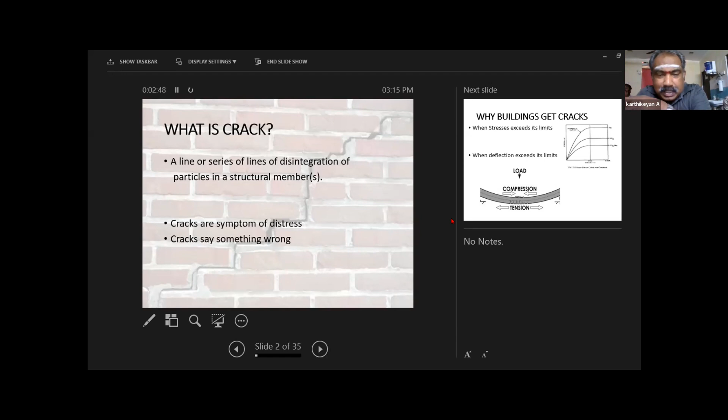Why does a building get cracks? When stress increases beyond its limit, or when deflection increases beyond the limit. There are only two reasons. Majority of the cracks in a building come from two reasons: one, the stress may increase, or the deflection may increase.

Once you load the building, stress develops in it. Every building will withstand stress. In student life, people face exams, so the syllabus is heavy. On normal days, our stresses are less.

In exam days, the stresses are more because the syllabus is more. Within stipulated time, you have to prepare, and within stipulated time, you have to write the exam. So stresses are more. After the examinations are over, your stress is released, you are free, you feel very free. Similarly, in buildings, when people and loads are accumulating on buildings, the stresses develop. When the stresses develop beyond the limit, breakage and failure occurs, which creates cracks.

Similarly with deflection: when you sit in a chair, it slightly deflects. Similarly, if there are a lot of people sitting or standing on a building, the building slab slightly bends, which does not get noticed by anybody - that's okay. But if the deflection is more, then there is a chance of cracks on the slabs.

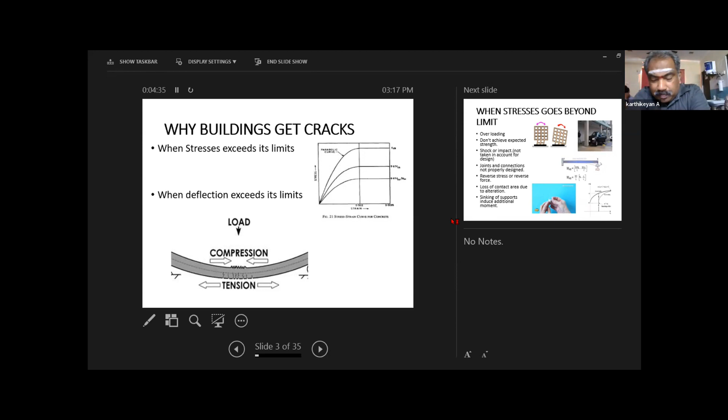When stresses go beyond the limit, mostly due to overloading - say a hall is designed for 200 kg per square meter. Due to some occasions, more people may occupy one floor, one room, or one building. Sometimes it is designed for residential purposes but let out for commercial purposes. The person using it for commercial purposes may store more materials, so the live load increases.

Likewise, overloading happens when a building is designed for ground plus 3 stories or 4 stories only, but people construct 2 more stories over that. So it becomes overloading.

The building does not achieve expected strength. People design for M30, M40, but many don't achieve even M20 grade. Whenever the designer expects something, the contractor or site people might not achieve equal to the expectation of the design requirement. So the expected strength is not achieved.

Shock or impact - there is a corner you can see, a stilt floor column. It's a car parking area where the car may hit the column. It's a shock - during construction, the JCB or lorry may hit the building. So that is a shock or impact, and that also has to be taken into account for design. In industrial sectors this is very common - there are cranes and a lot of moving equipment that may hit the columns.

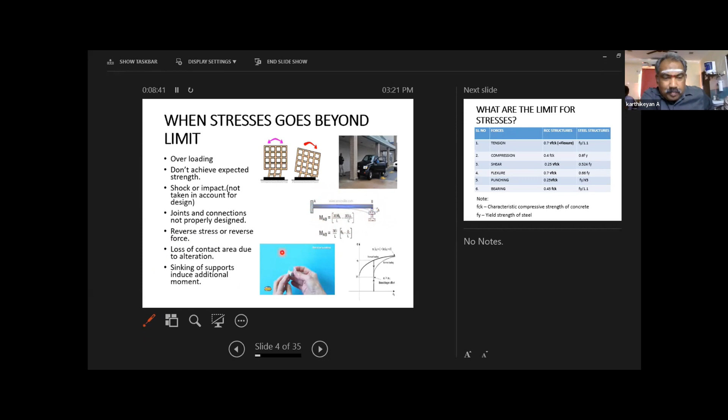What are the limits for stresses? Every material, or every member, has allowable stresses. If it is a tension member or there is a tensile force, in RCC structure, 0.7 root FCK is the allowable flexural stress. For steel structure, it is Fy, the yield strength, divided by 1.1.

I think it's fine, sir. Is it, ma'am? Yes, sir, previously I left it here - where the limit for the stresses is. Yes, sir, yeah, please proceed.

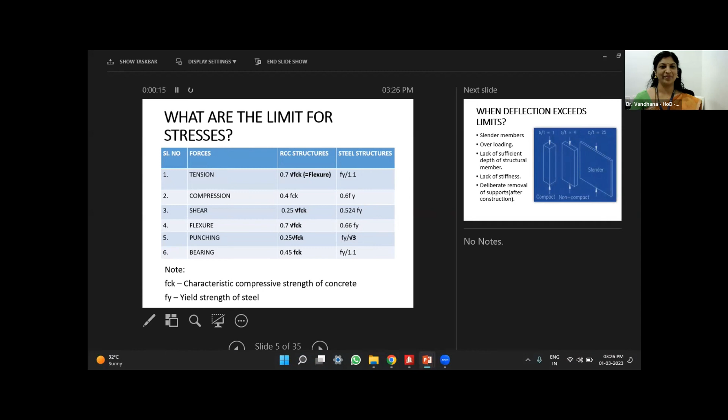So if the tensile forces increase beyond the flexural values, there is a flexural crack or tensile crack. Similarly, if there is a compression crack - if you overload the structure, there is a chance of more compressive stress. If the compressive stress is more than 0.4 FCK, there is a chance of compression cracks.

Shear cracks - that is, the joint is like a scissor. If you take two knives acting parallelly in one direction, the paper or cloth will not cut. But in a scissor, there are two opposite reactions - one is action, another is reaction. If you introduce a paper or cloth, the scissor cuts it. Similarly, when there is a beam column joint or beam column foundation joint, wherever there is a joint, one action and reaction is there. When there is an action and reaction, there is a chance of shear crack.

So the shear stress should not exceed 0.25 root FCK in concrete, or 0.524 Fy in steel. In flexural cracks, as already discussed, it is tension 0.7 root FCK in concrete, or 0.66 Fy in steel.

Punching - when a column meets a foundation, there is a chance of punch. That is, the column's area is very, very less when compared to the foundation area, which is very big. So there is a stress concentration, called punching stress. If the punching stress is more than 0.25 root FCK, then it creates cracks.

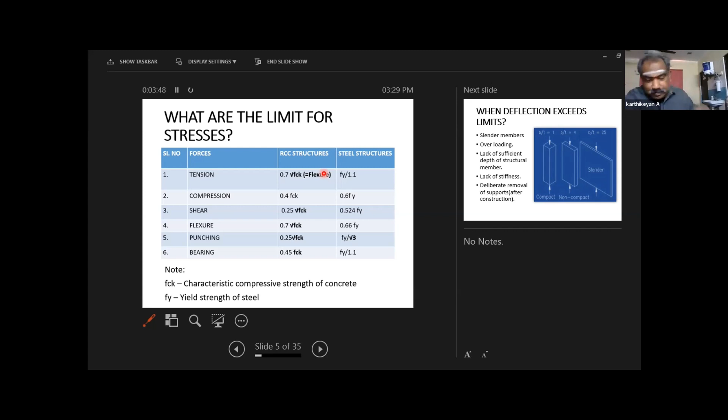If the stresses are beyond the limit, there is a chance of cracks. Deflections - as I said earlier, architectural constraint or contractor constraint or economical constraint make us create slender members. Nothing wrong with that, but this slenderness should not increase the stress and should not make the member more deflectable, more deformable. Due to overloading also, the members get deformed. Lack of sufficient depth in structural members is another cause.

Our very first introduction in strength of materials, engineering mechanics, or applied mechanics is moment of inertia, I equal to BD cube by 12. So in case of IS 456 or IS 800, codes are very much concerned about span by effective depth ratio, but they are very silent about width ratio. They are very strict: if it is a cantilever, 7; if it is simple support, 20; if it is continuous, 26; and if the span is more than 10 meters, different rules apply.

So lack of stiffness is another important reason for more deflection. If there is more deflection, there is a chance of cracking. And deliberate removal of supports after construction - sometimes the architect wants to remove a column. People blindly remove the column, and the beam simply becomes a cantilever beam that will deflect more. Premature removal of formwork without proper stripping time also leads to cracks.

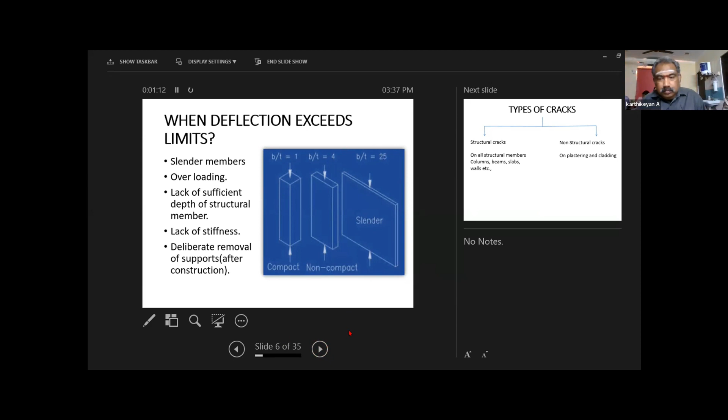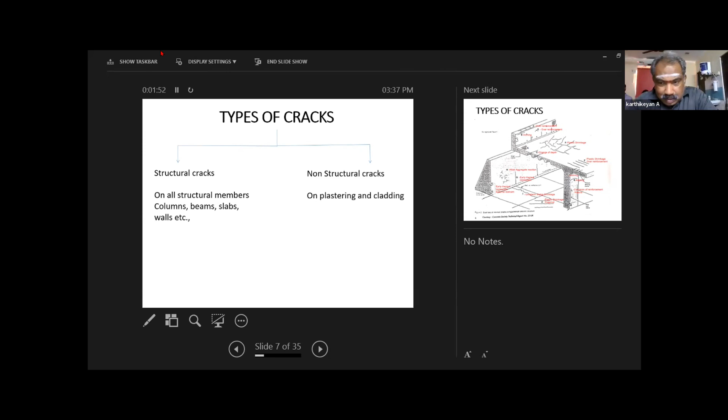Cracks can be classified into two types. One is structural cracks, another is non-structural cracks. Structural cracks are the cracks on structural members like columns, beams, slabs, walls, etc. Non-structural cracks are the cracks on the plastering and cladding elements. Non-structural cracks you need not worry about much, but structural cracks give some warnings that something is wrong. But common people don't know what is a structural crack and what is a non-structural crack, so they fear cracks.

In case of RCC, people think more steel is more safe - that is a bad thinking. If there is more steel with very less spacing, ductility issues again start, and there is no proper bonding between the steel and the concrete, causing cracks due to over-reinforcement. And alkali-aggregate reaction - that is a different topic we have discussed elaborately - is where the coarse aggregate and fine aggregate react with the cement. That reaction may create cracks. If there are overreactions, that also creates cracks.

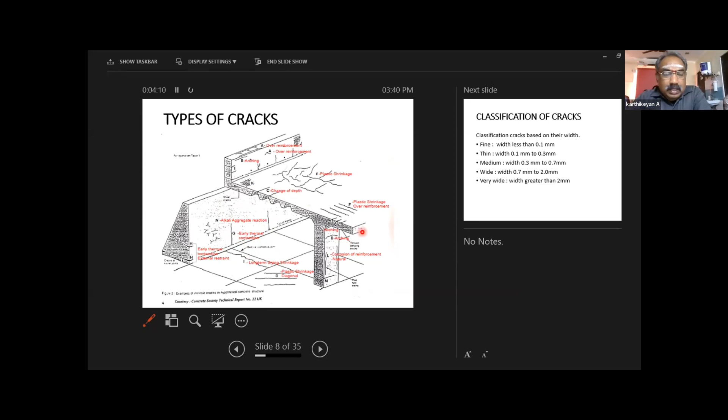There are 17 types of cracks, we will go one by one. Before that, classification depends on width of crack. We can classify fine crack, that is less than 0.1 mm, which is not visible by the human eye.

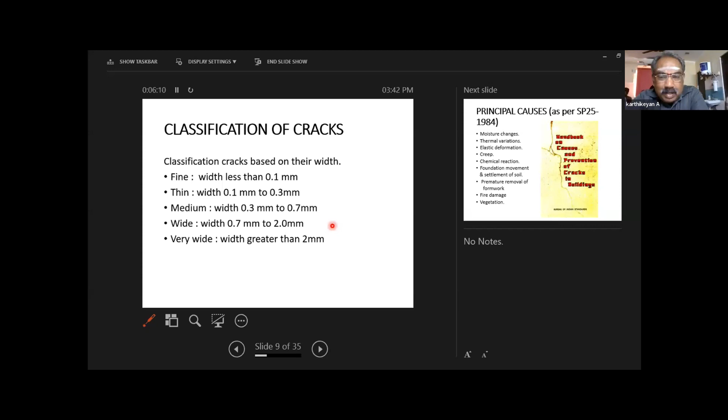There is a book called Special Publication 25, 1984 by the Bureau of Indian Standards. They issued a handbook on causes and prevention of cracks in buildings.

They classify the major principal causes as moisture changes. In the season changes, there is moisture changes and thermal variation, both depending on seasons. Also elastic deformation.

When you are sitting, and then you go out from the room, the deformation rebounds. Fatigue: assume you take a thin plate and apply forward and reverse repeated deformations, that creates fatigue.

Take 1 kg of apple or fruit in a plastic bag, which is proven, should be prevented. You purchase it in a plastic carry bag and hook it on a nail or something. After 1 hour, you need not add even 1 gram of additional weight, but the plastic bag, because of constant stress, the creep creates cracks. That is also created in buildings.

Chemical reactions, as I told earlier, there are alkali aggregate reactions and other chemical reactions in buildings that create cracks.

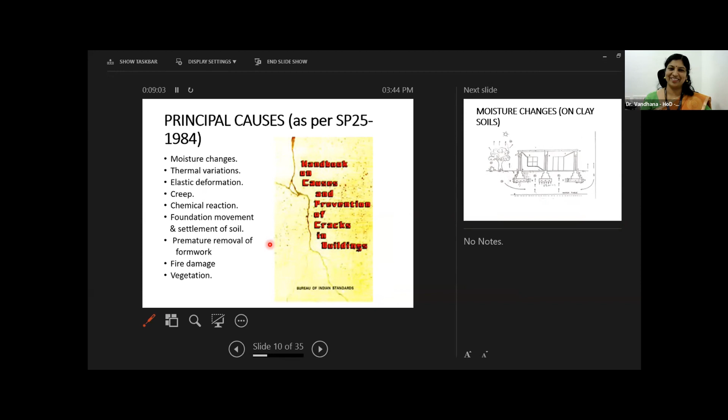Premature removal of formwork. Sir, there is IS 456 which clearly gives up to... there is a slight lag in your audio, sir. It's slightly interrupted, I guess. Maybe keep it a bit away. Please proceed. Is it okay now?

Premature removal of formwork. People put formwork, then they pour concrete. For a given span, there is a required strip time. Before that, you should not remove the formwork. Sometimes due to site conditions, people force the site engineer to remove the formwork to meet the construction schedule, so they remove it prematurely.

Fire damage: in some places a fire may occur accidentally, and it may damage the concrete or masonry, creating cracks in the building. Also vegetation: nearby tree roots may penetrate into the building and create cracks.

So these are all the major causes of cracks in buildings. This is very clearly given in the handbook on causes and prevention of cracks in buildings. You can easily download it online: SP 25, 1984.

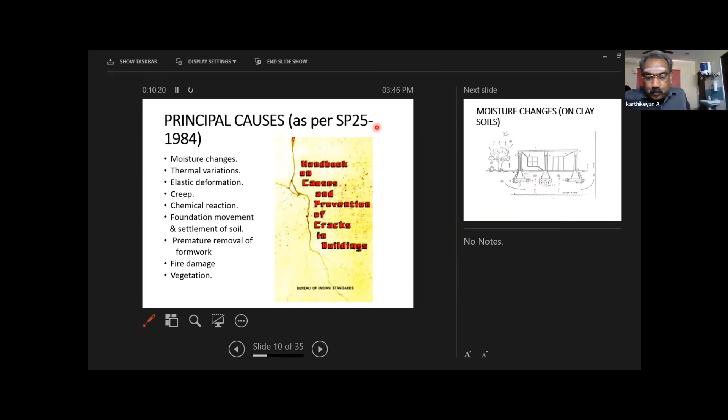Moisture change is the most important factor, particularly in clay soil. If it's an expansive soil, the bearing capacity is already poor, but the moisture creates a very vulnerable chance of cracks.

Assume you are not constructing any building on a land; it is a fertile, virgin land with nothing on it. At that time there is some moisture content, say 30% or 40%. Now assume you construct a nice building on it.

What happens? You are preventing the moisture from evaporating from the soil. The building blocks sunlight, so it protects the soil moisture underneath. But outside the building, trees suck the moisture and there is evaporation of surface water.

So there is a moisture imbalance: outside the building it is dry, inside it is moist. If it is clay soil, there is shrinkage. You may see this in paddy fields, with a lot of shrinkage. So shrinkage is dominant around the contact area, and the foundation is the contact area — the soil and structural contact area creates a lot of shrinkage.

Here the density is more because of more moisture; there the density is less. If the foundation is not enough to withstand the lateral pressure, there is a slight movement, and that movement creates cracks like this.

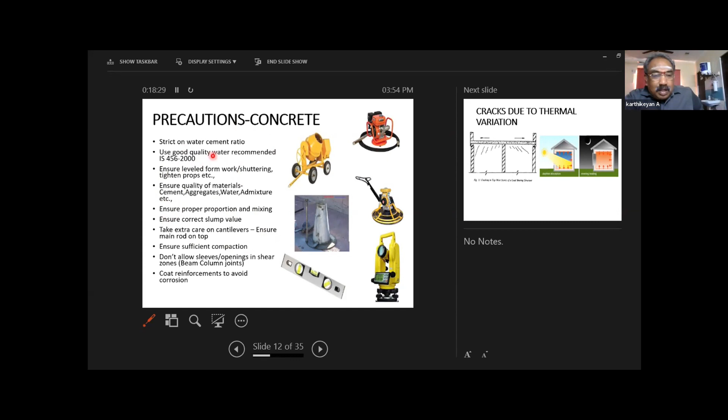Due to thermal variations, in our country, in Tamil Nadu, South India, our temperature in summer is 45 degrees Celsius, and in winter it's 20 or 25 degrees Celsius. So there's a 20-25 degree Celsius variation. The top surface expands, and when it expands, there are cracks at the slab and wall junction.

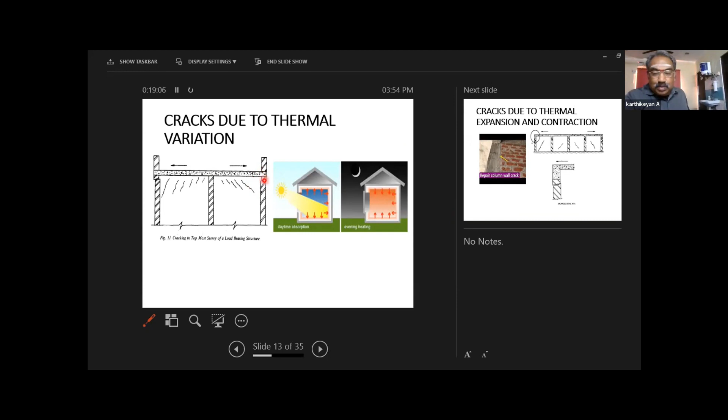So people may think that if you provide a beam, there will be less chance of cracks. Yes, if you provide a proper beam, there is less chance of cracks. But my next slide shows that even with a beam, there is a chance of crack below the beam. So how do we avoid it?

Most of the cracks are in masonry, because in RCC, other than corrosion, the cracks will somehow be withstood because steel is there. Steel takes care of tension, concrete takes care of compression, so it will somehow manage. But masonry is a brittle material, so in case of masonry there are more chances of cracks.

For that, choose proper brick units. That is very important. Bricks should be well burnt.

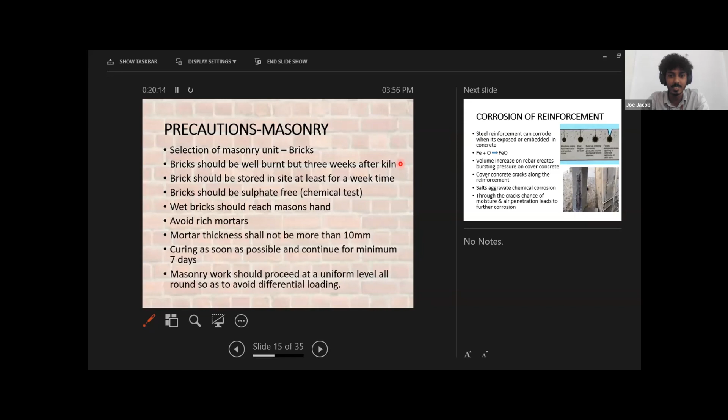Rajesh Datta is asking whether SBC of soil plays a major role with structural design, and whether in clay soil it can avoid cracks. SBC purely depends on the size of the foundation. In my previous slide, this person designed for the size of the foundation based on SBC, and he calculated the load in the vertical direction, Fy. So for load versus bearing capacity, there are no issues.

But because of moisture variation, the inside moisture is more, the outside moisture is less. There is a push. If the substructure is not sufficient to withstand this push or swell, there is a chance of movement, and if there is movement, there is a chance of cracks.

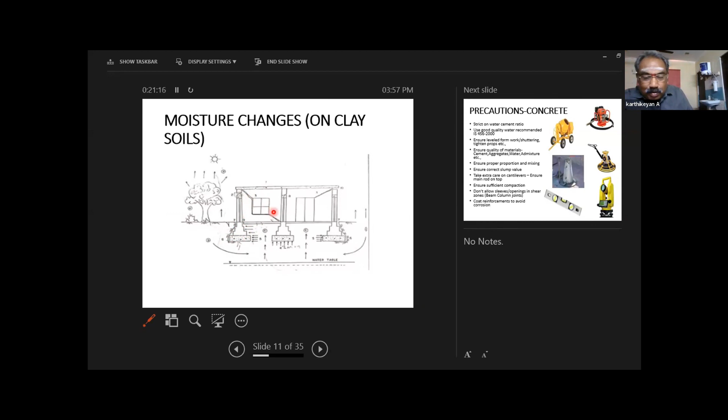Are you comfortable, are you satisfied, Mr. Rakesh or something? Are you comfortable, are you satisfied? Yes, there are a lot of issues regarding soil-structure interaction.

I will explain in further slides. Before that, let us go into brick units. People are in a hurry to purchase the bricks. The bricks should be well burnt, and only after 3 weeks from the kiln or chamber should they be brought to the site. On site, the bricks should be seasoned for 1 week, because the manufacturing temperature is different from the site condition temperature. So you season it for 1 week.

Then the bricks should be sulfate free. If you have any doubt, check it with the chemistry lab. What happens if there is sulfate? You are applying cement mortar with the brick units, and the sulfate reacts with the cement mortar to make calcium sulfate. The calcium sulfate becomes a weaker material, it peels off and becomes powder form, and falls down from your masonry. This makes the masonry weak and causes a lot of cracks, so it should be sulfate free.

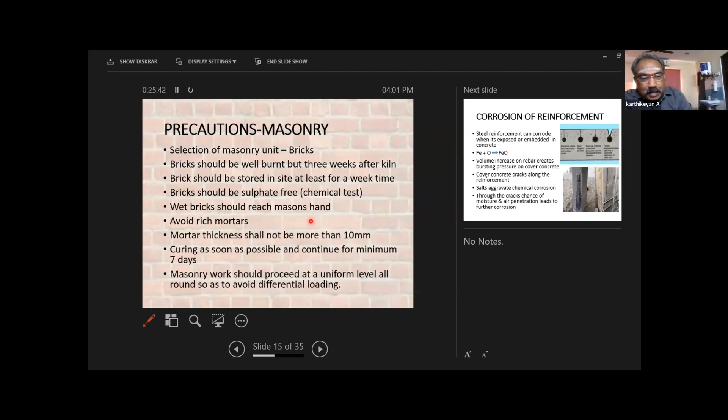Another headache in civil engineering is corrosion. People use very good cement, people use very good steel, but why do corrosion cracks still come? Steel is susceptible to corrosion in spite of good manufacturing technology, because there are two types of corrosion: one is surface corrosion, another is galvanic corrosion.

You purchase steel and keep it outside. Even after 1 year, only the surface gets corroded. The inner core is still very strong. But what happens in RCC?

The steel reinforcement corrodes when exposed, even when embedded in concrete, there is a chance of minor cracks on the concrete surface. When there are minor cracks, moisture may go inside. When the moisture goes inside, there is bulging as Fe becomes FeO. The FeO forms around the rods, creating an osmotic pressure that bursts the concrete and makes a wider opening.

The wider opening allows more water and air to accumulate around the steel bars, and there is a continuous reaction that makes the structure like this. The volume increases and the rebar bursts. The increased volume of the rebar bursts minor cracks into wider cracks.

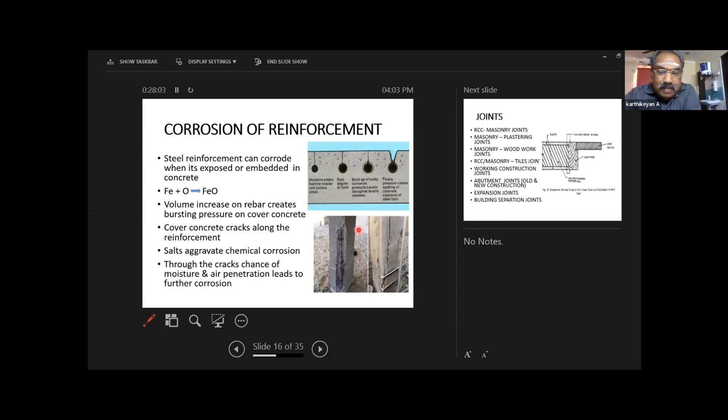So at the joints, we use about 40 varieties of materials in buildings: concrete, steel, masonry, wood, tile, paint. Small material to bigger material, we use 30 to 40 varieties of materials. Different materials have different coefficients, mostly thermal expansion and contraction coefficients, and that creates susceptibility to cracks.

At masonry and plastering joints, there is a chance of cracks. At masonry and wooden joints, there is also a chance of cracks. So good masons, after plastering, make a groove. This groove should be given - only good masons do this, other masons simply plaster and leave.

You make a small groove at the wood and plaster joint, then you avoid cracks. Otherwise there are cracks, people notice and then they complain about you. So the small things lead to perfection.

At RCC masonry and tile joints, proper spaces should be provided. People make joint-free tiles and then there is a chance of cracking.

For working construction joints, you cannot construct the entire thing in one day, so there is step-by-step construction. The construction joints should be properly maintained and properly constructed, otherwise there are cracks.

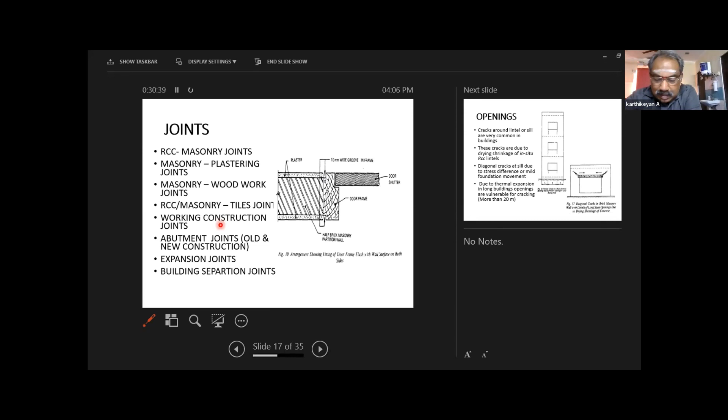In case of openings, you may have seen this in many buildings. Take your shirt for example - around the button, there is stitching. Your tailor knows better than your actual engineer. If there is an opening, you have to properly reinforce it.

This happens mostly due to shrinkage of lintels and sill beams. In masonry structures, load is applied above and transferred from the lintel. Here the area is more, there it's less, so stress is more here and less there. Under the joint there's stress variation, creating a chance of cracking, and more general cracks are possible. Due to thermal expansion, the best way to provide a lintel is a precast lintel, though it's a bit cumbersome for workers. But wherever possible, use precast lintels to avoid shrinkage of lintels and cracks above them.

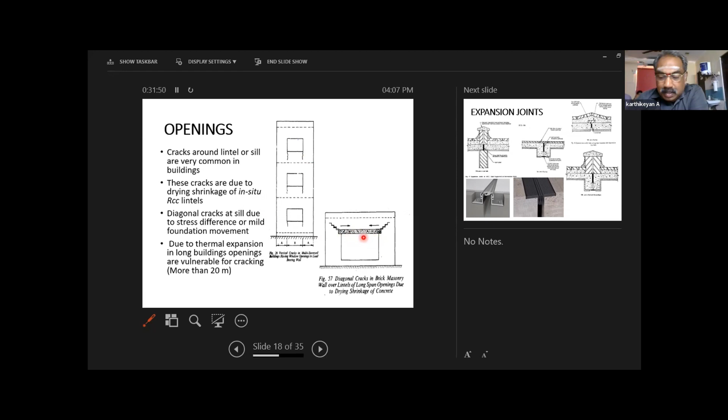This is the old method of giving expansion joints, which people still use. Because of this, there is a lot of leakage in expansion joints. Nowadays, modern rubber and metal materials come like this, creating very nice expansion joints as well as waterproofing.

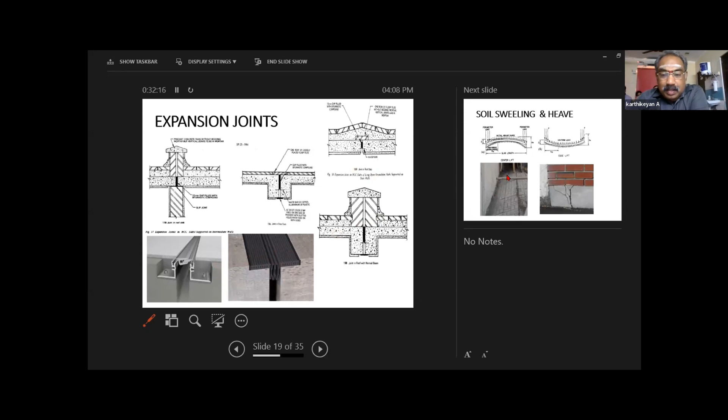Soil swelling and heave: people construct buildings on clay soils. They worry mostly about foundations but least bother about the flooring and outer flooring, where heave due to swelling of soil causes this type of cracks. To avoid it, remove the clay soil and replace with quarry dust or better non-swelling soil, or go for lime treatment and calcium treatment. This type of swelling and sinking is very common.

Even in IT parks I can testify, some IT parks least bother about proper filling and don't use proper filling material. The filling material may have clay content, which may swell and sink, causing heaving and sagging of floor slabs.

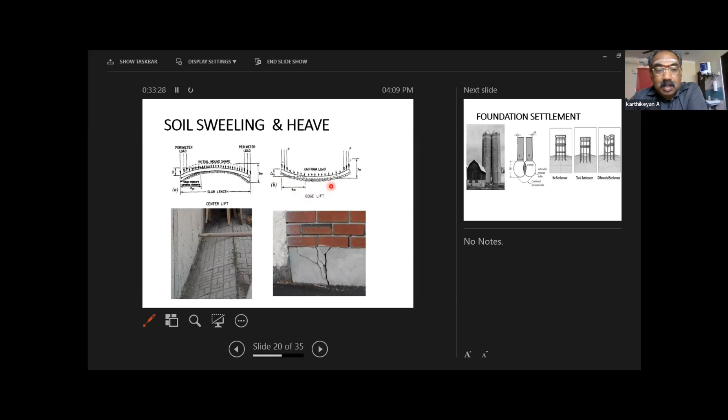One point concerns foundations. Here you can see two towers kissing each other because one tower's pressure bulb is like this, and another building constructed very close has a pressure bulb like this. The two pressure bulbs overlap, so the soil is stressed more there, causing shear failure and tilting of the building.

Settlement: if there is no settlement, there are no cracks. If all columns settle uniformly, again no cracks. But with differential settlement, you have to be very careful, because it creates settlement cracks not only in the ground floor but even in the terrace.

This is one very interesting story. A friend called me saying the weathering course tiles were cracking. I went there and told him to remove the weathering course tiles and relay them. He relaid it, but after 6 months it cracked again. We relaid with good material, but after 1 year it cracked again. Then we found there was foundation settlement. So foundation settlement not only leads to masonry cracks but can even cause ceiling cracks due to differential settlement.

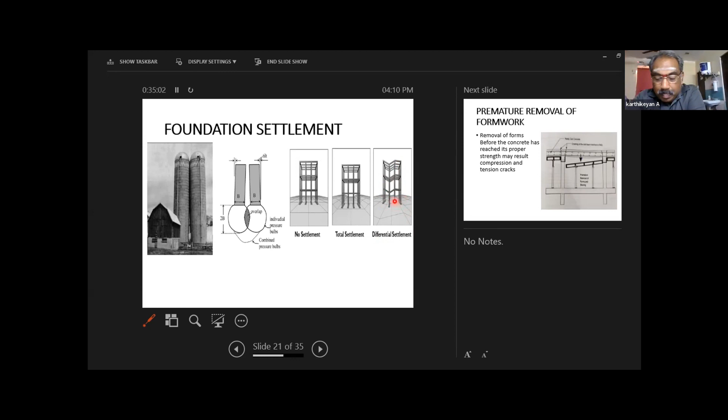Premature removal of formwork: as mentioned earlier, due to some compulsion people remove the formwork early, so the concrete might not achieve its entire expected strength. Heavier sections may somewhat withstand this, but lighter section joints have a greater chance of cracking and sagging, which creates cracks in the buildings.

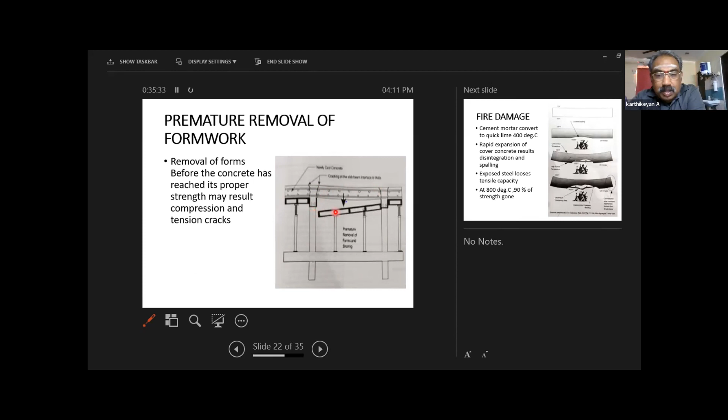Fire damage: in commercial buildings, people do very good interiors, and most interior materials are plywoods, curtains, and other accelerating materials. If for some reason a fire is created, it can prolong the fire rating to 2, 3, or 4 hours. The cement mortar converts quick lime at 400 degrees Celsius, converting cement into lime.

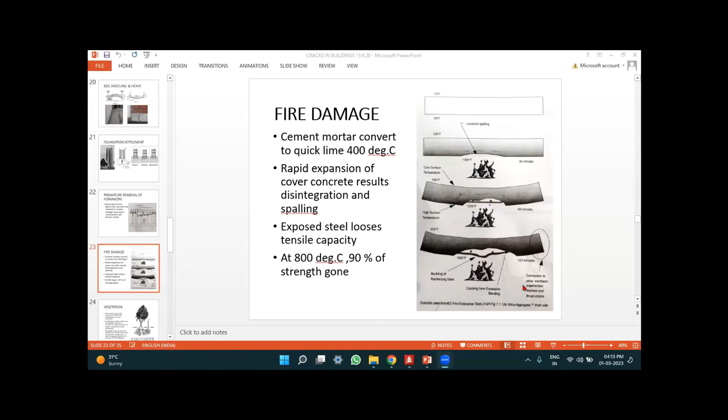Now? Now, ma'am? Yes. Yes, sir.

I explained about fire damage. Fire damage makes the concrete weaker. Once the concrete is weaker, concrete falls down and steel gets exposed. Steel is highly vulnerable to heat. It bends off, and when it bends off, there is further collapse of concrete.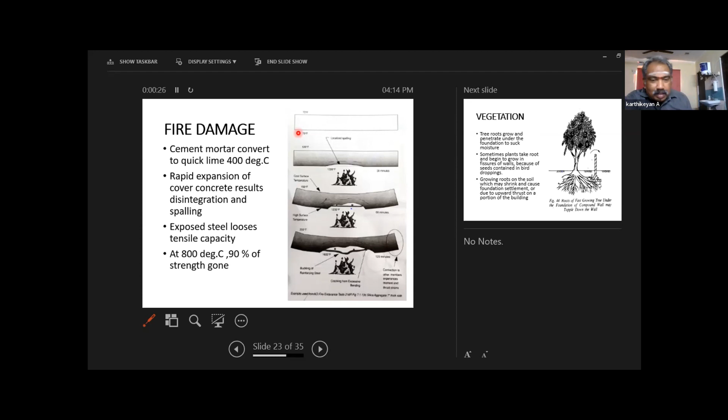Vegetation. People, there is a proverb: let us grow one tree per house. Every house has at least one tree.

But if you plant a tree, you have to pour water. Otherwise, trees are smarter than us - they know where our water is. They send their roots into our building. Below the plinth there is a moisture prevention layer, and they suck the moisture. When the tree roots go into a building, the sucking of moisture creates sinkage of the floor, and the roots may uplift and create a moment on the structure that creates cracks. So if you plant a tree, everything is okay, but pour water - if you don't, your tree may damage your building.

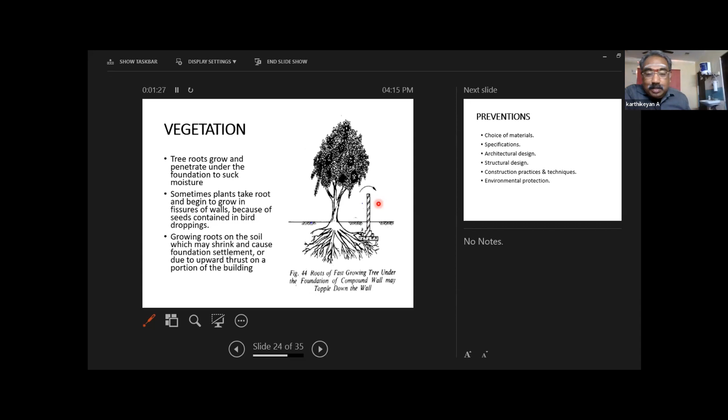How to prevent cracks? One is choice of materials, another is specifications, third is architectural design, another is structural design, construction practices and techniques, and environmental protection. These are all the things to prevent cracks in a building.

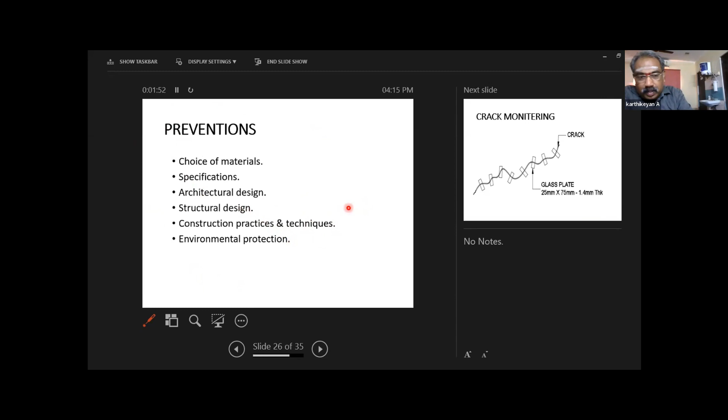How to monitor a crack? When a crack appears in your building, don't suddenly start the repair. You have to monitor whether the crack widens, closes itself, or stays standstill for several months. Most people don't have patience, so they suddenly go and make repairs with masons without proper professional advice, and after 5 or 6 months there is a crack again.

So you have to observe using a small glass plate, like what is used for blood tests in labs, or what is called a crack meter - a glass plate with divisions that you stick on the crack with glue. Or you can use a small piece of paper stuck on the crack instead.

If the crack widens, the paper tears off or the glass gets broken - that is a warning the crack is progressive. If for several months, more than 6 months, nothing happens to the glass piece or paper, it means the crack is dormant, and after that there is nothing to worry about, so we can easily attend to it.

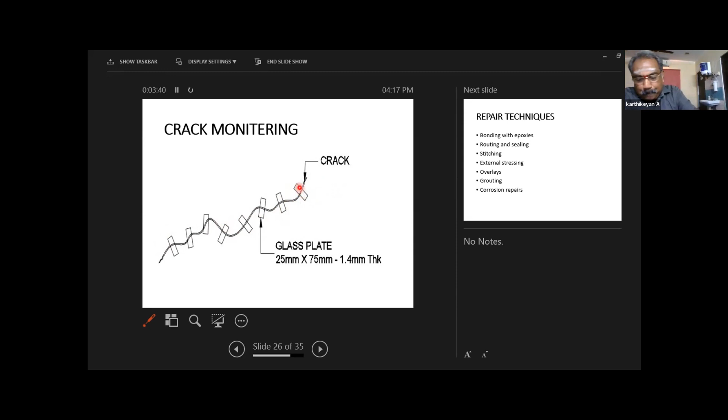If the crack is active, you have to find out the reason for the cracks, and then first stop the source of action which creates the cracks. Bonding with epoxies, routing and sealing, stitching, external stressing, overlays, grouting, corrosion repairs - these are all the repair techniques. Let us go one by one.

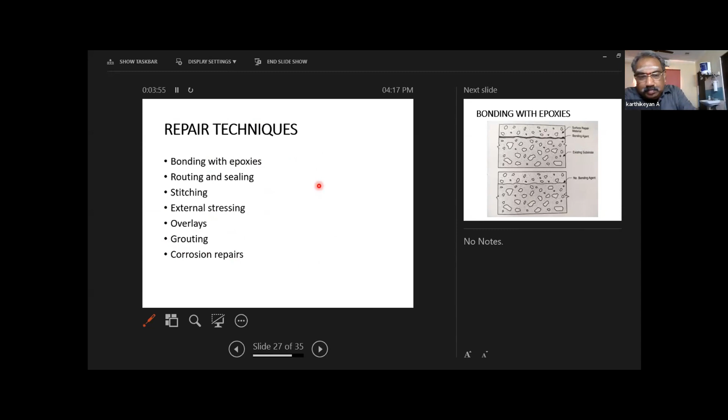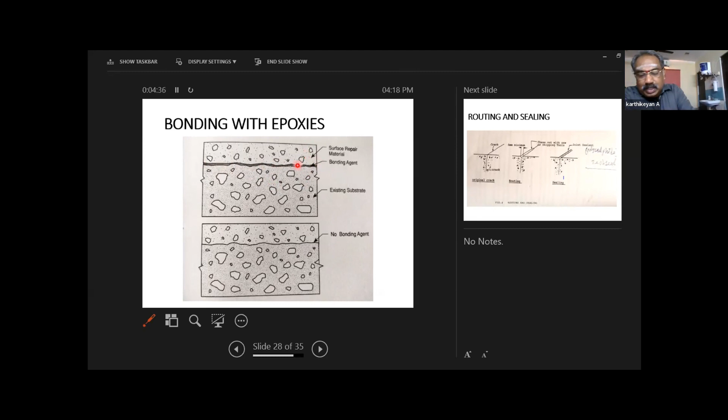As I said, people construct one type of concrete this week, and the next day or next few days they construct continuous concrete. Without a bonding agent or bonding coat, if you construct the concrete, there will be shrinkage cracks. So they have to provide a bonding agent with epoxies - a famous bonding coat is Nitobond EP. If you apply that bonding coat on the existing concrete, you can then construct further concrete. This is one type of crack prevention technique in concrete continuation.

Another case: in a concrete surface or brick surface, there is a mild crack you can see, less than 1 mm or 1 mm. How are you going to seal it? It is very difficult to seal such a crack because we don't have tools to apply on it. So make a groove on the crack using proper tools so that you can apply a sealant.

Mostly polysulfide is the material used as a sealant. There are other sealants also - silicon sealant, polyurethane sealant - depending on requirement. If you just want the crack to be sealed, polysulfide sealant is okay. If you want the crack to be watertight, you have to use polyurethane sealant. So make the crack wider by grooving and then put a sealant.

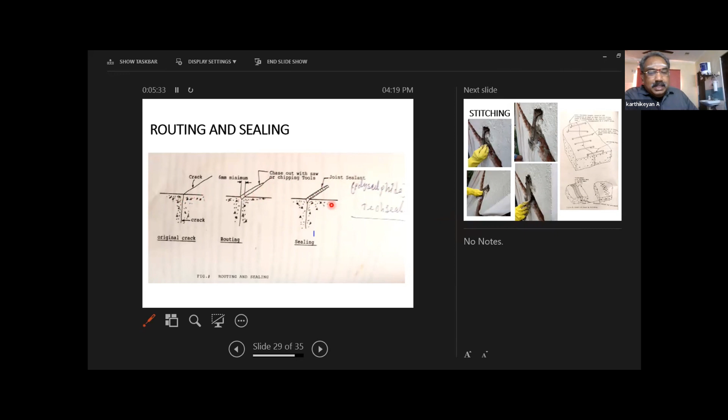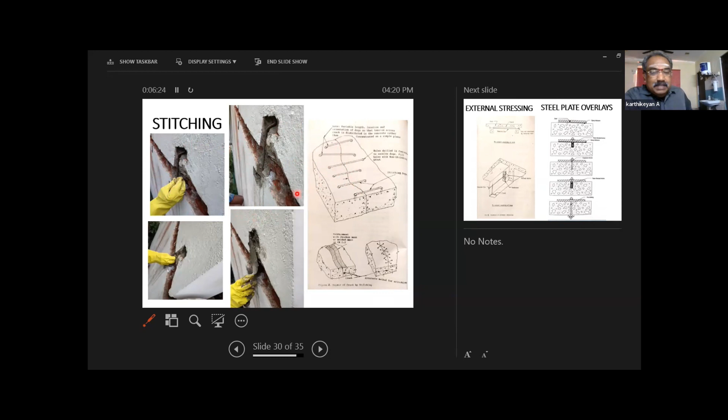Drill a hole here, drill a hole here, and then make a rectangular U-shaped steel rod, grout it inside the masonry or the RCC, and properly seal it like this. So if the crack tends to bend or expand, these rods do not allow it to expand, so there are no further cracks. This is one of the very good successful methods - we did it at many sites. This is one method of crack stitching.

This external stressing - you might have studied about pre-stressed concrete. In this, there is a chance of cracks in the slab. How to avoid sagging of slab? The beams are okay, but if only the slab vibrates or cracks or sags, drill a hole here, drill a hole here, put strong rods and tighten with bolts. So it does not allow further sagging of the slab.

If the beam also sags or cracks, you have to provide detailing like this: steel plates with gussets on opposite sides, and provide a rod like this. When the beam tries to bend, the rod gets tension and does not allow it. It is like a pre-stressing technique - this is an external stressing technique. So this is one method, but it is mostly a temporary method because people don't want to see this type of rods in their buildings.

So we have to go for further crack repair techniques. This is steel plate overlays. If there is sagging of a slab or beam, they put epoxy and a steel plate, or they bolt it with chemical grouts and then put a bolt and a steel plate, or mechanical anchors, or they put a steel plate on one side with through bolts and another steel plate on the other. So this is one type of steel plate overlay.

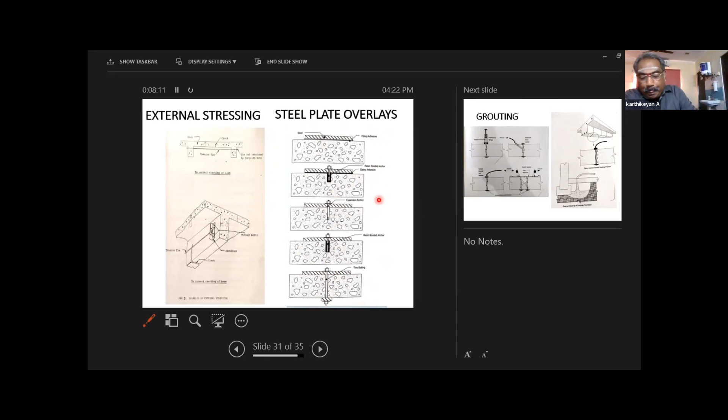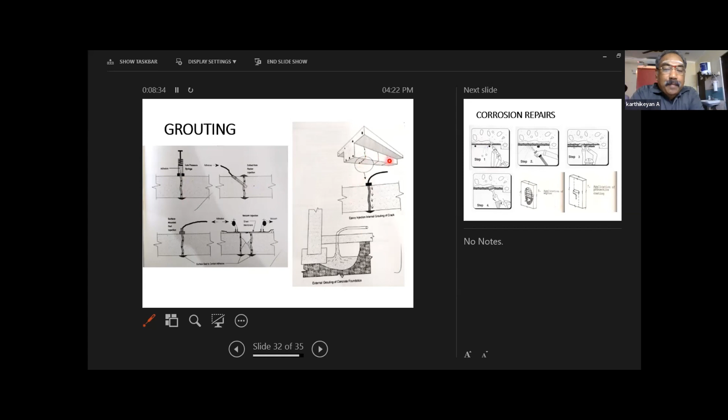And where there are cracks, people inject a chemical called epoxy. Epoxy goes inside - epoxy is a much better binder than cement, so it goes inside your cracks and binds the crack. So this type of grouting with epoxies. And corrosion repair.

We have seen elaborately about how the rod gets corroded. When the rod gets corroded, the concrete surface cracks. People simply ask a mason to remove the corroded surface and then replaster or re-concrete. Within a few months, corrosion occurs again and it keeps cracking. So how to avoid it?

Step number one, you have to remove the entire cover concrete and expose the steel rods, then remove corrosion by sandblasting, emery paper, or corrosion removal chemicals - there should not be any corrosion left on the steel. When you remove it, the diameter may get lost - a 16mm rod may become 12mm or 10mm. You have to use a vernier caliper to check the original diameter of the rod versus the diameter after removal of corrosion.

If the corrosion loss is more than 20%, then you have to weld additional rod, otherwise you can proceed. If the corrosion is more than 20%, you have to weld additional rod. And then apply

anti-corrosive paint on the steel rebars, and also, as I said, a bonding coat like Nitobond on the existing concrete. Then apply fresh concrete or micro concrete, or screed concrete on the reinforcement, and then finish with fine mortar and properly paint it. This step-by-step procedure should be followed.

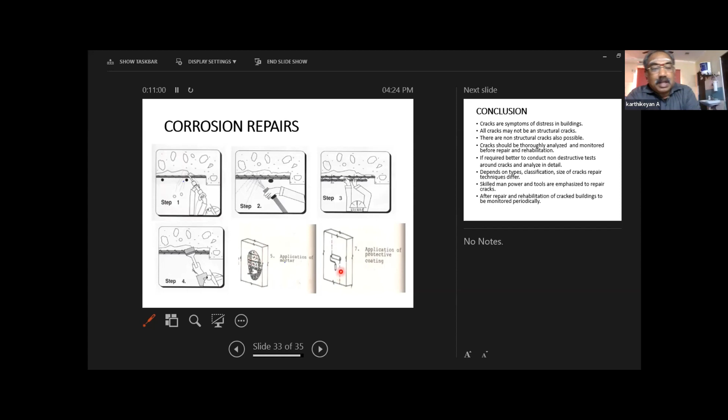People do not use this method because it is a very skilled job. They simply call masons who cover it with mortar or local concrete, and again within a few months it cracks. So: remove the cover concrete, remove the corrosion. If there is a loss more than 20%, you have to add further reinforcement. Apply corrosion resistant paint and bonding coat. Provide additional screed concrete or micro concrete and then mortar finish. This is how, step by step, you have to make corrosion repairs.

Let us come to conclusion, because crack repair is a very big topic - within 1 hour it is very difficult to cover everything. But to my best, I covered the reasons, the materials to be handled, how cracks are to be repaired. Cracks are symptoms - okay, I am coughing, I am sneezing, that means I may have a lung infection, I may have some bacterial infection. Similarly, if there is a crack, the building is saying 'I am not well, take care.'

The cracks may not be structural cracks - all cracks need not be structural cracks. There may be plastering cracks also, or sinkage cracks also - non-structural cracks are also possible. Cracks should be thoroughly analyzed and monitored before going for repair. As I said, you have to paste glass pieces or put papers and monitor whether the crack opens or is dormant. If required, it is better to conduct non-destructive tests around the cracks. It is a little costly, but conducting tests like ultrasonic pulse velocity test shows little more accurate results.

Depending on the type of crack and classification of cracks, the repair techniques differ. You cannot go for sealant everywhere, you need not go for stitching everywhere, you need not go for grouting everywhere. So which type of crack, which classification, what are the consequences - based on that, there is no one medicine for all diseases. Similarly, depending on the types of cracks, there are different types of repair techniques.

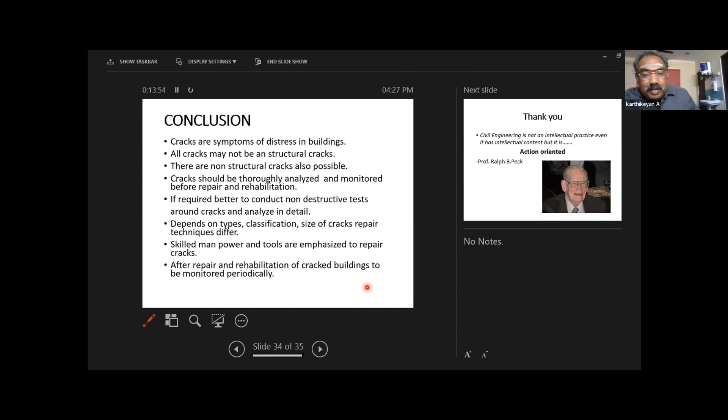Civil engineering is not just an intellectual practice - even though it has intellectual content, it is action oriented. So if there is a crack, you want to go and study step by step what is the reason, revisit, and then apply your proper methodology to ensure a proper repair.